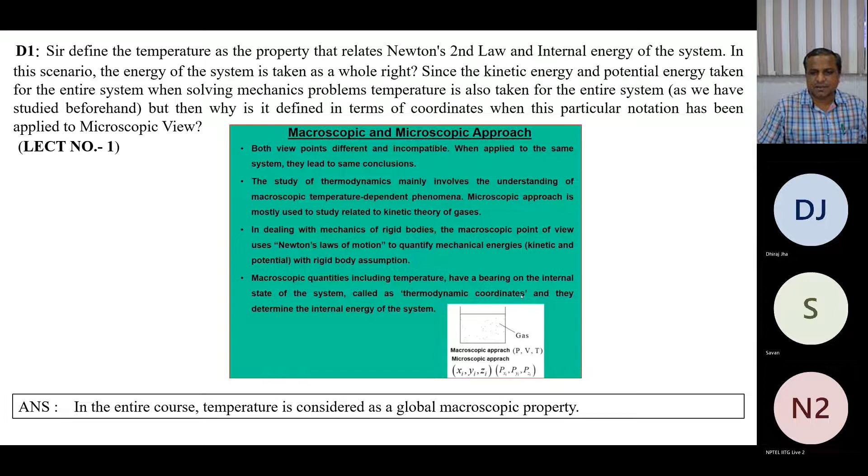But you should not worry about this microscopic approach, because in our entire course, we call temperature a global property, and it is a macroscopic property. When I say macroscopic property, that means we have taken enough mass, a minimum mass, for which the global temperature will not change. In a single line, temperature in our course is considered a macroscopic property, global in nature for the system.

The next question was on quiz 1, question number 7, which asked what the correct statements for the Carnot cycle are. The options are: the Carnot cycle is independent of the working substance; the Carnot cycle can have 100% efficiency; the Carnot cycle is represented by 2 isothermal and 2 adiabatic processes on a PV diagram. The learner wishes to know what happens to the source and sink temperatures. First of all, we have not asked anything about the source and sink temperatures.

But when you talk about 100% efficiency, of course, the sink temperature has some finite value, which means we are looking at the problem in a practical approach. So the efficiency of the Carnot cycle mainly depends on the source and sink temperatures. We can write it as efficiency equals 1 minus T2 by T1.

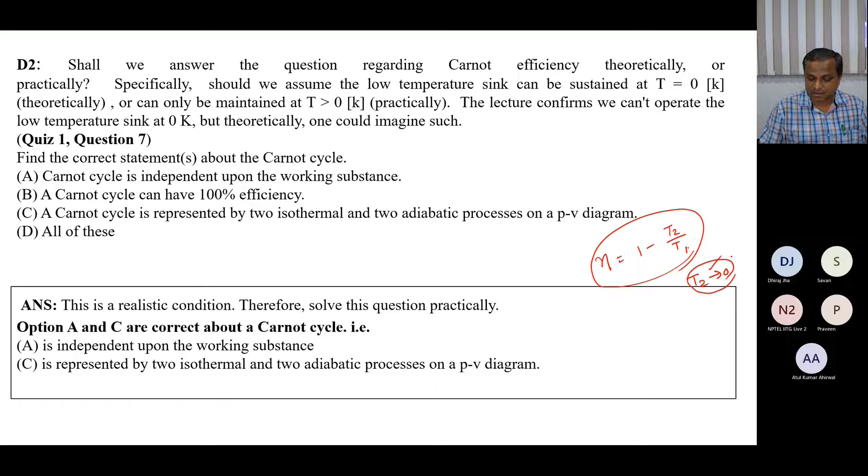It will have 100% efficiency when T2 goes to 0, which is a very hypothetical approach. That means the Kelvin temperature goes to 0, which cannot happen in a realistic or practical situation. This efficiency is the maximum possible efficiency, the thermodynamic estimate of maximum efficiency for the Carnot cycle. Considering this philosophy, option A and option C are correct.

The next query was based on quiz 2, question 10, about a reversible cyclic engine with 2 heat sources. One is a finite body at 900 Kelvin, so T1 is equal to 900 Kelvin. It is connected to a cyclic, reversible heat engine, which produces some work output while rejecting heat to a reservoir at 300 Kelvin.

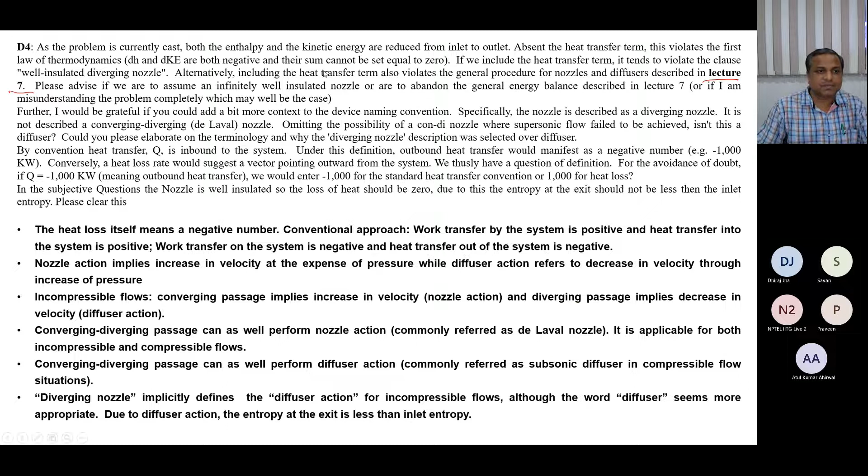The next query was mainly on lecture 7. It's a big statement the learner wishes to share, but for a few things we are not clear in what context the question was raised. I can sense some of the important concepts in the entire paragraph written by the learner.

The first thing pointed out is something about heat loss, a heat loss outward from the system. And when I say heat loss, by loss it means it's a negative quantity. One way to approach this is to recall our basic understanding of the conventional approach. In fact, we have to look into the UG level of this course, the notations for work transfer and heat transfer.

So in a conventional approach, work transfer by the system is positive and heat transfer into the system is positive. Work transfer by the system means the system does the work, and when some heat is entering into the system, it is taken as positive. So both heat and work need to be looked into simultaneously.

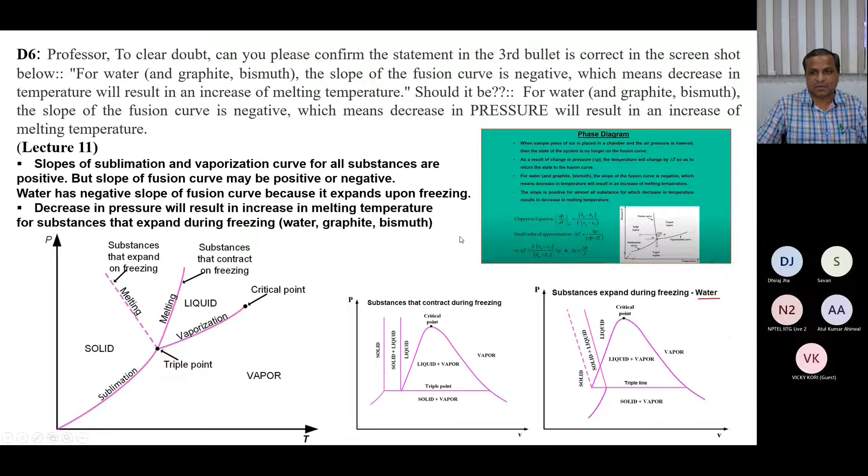Water in particular has a negative-slope fusion curve because it expands upon freezing. To frame it correctly, a decrease in pressure will increase the melting temperature for substances that expand during freezing. Some examples are water, graphite, and bismuth. But all other substances that contract will have a positive slope, so the reverse statement holds true. I hope you understand the meaning of this.

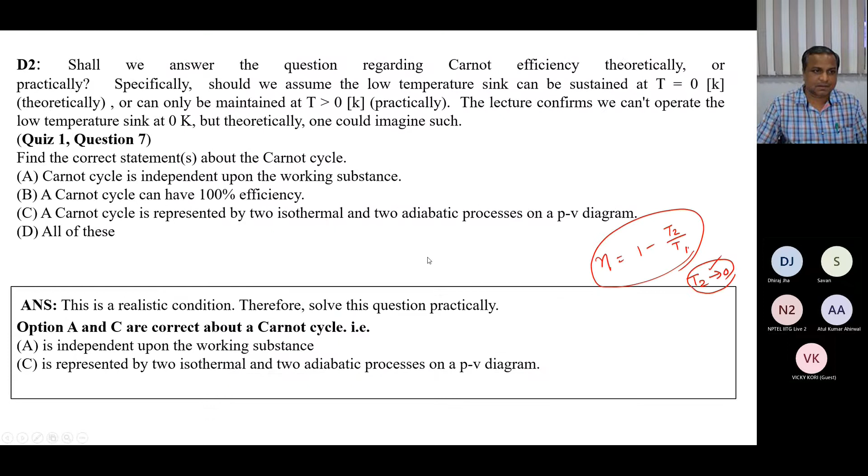Quiz 3, question 8. Here we are talking about atmospheric temperature, T0. There is missing data for T0, but this answer was calculated based on T0 as 278 Kelvin. Although there is missing data, when we calculate the exergy, we normally refer to the dead state. In all our lectures, we said that the dead state is typically considered as 1 atmosphere and a temperature of 300 Kelvin.

Since some data was missing, if you take T0 anywhere between 278 Kelvin and 300 Kelvin, whatever value you get, we will consider for calculating the entropy balance equations. So this number will have an answer range for these two temperatures, from T0 as 278 Kelvin to T0 as 300 Kelvin. Any answers falling in that range will be considered for evaluation.

So I hope it answers the question. You should not panic about these aspects. We are already considering an answer range, not a fixed answer. In our entire calculations, we are not sticking exactly to a fixed answer; we are talking about an answer range. So whatever temperature you considered, if your answer falls in that range, we can accept it. I hope I have answered your queries. Any other questions?

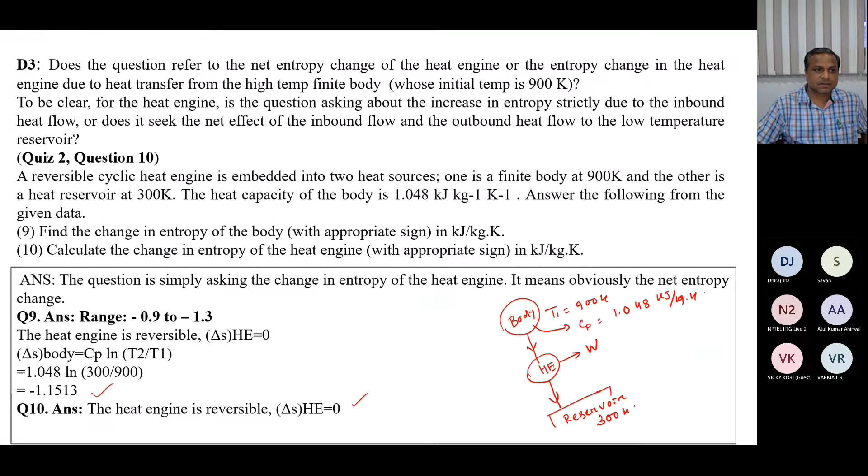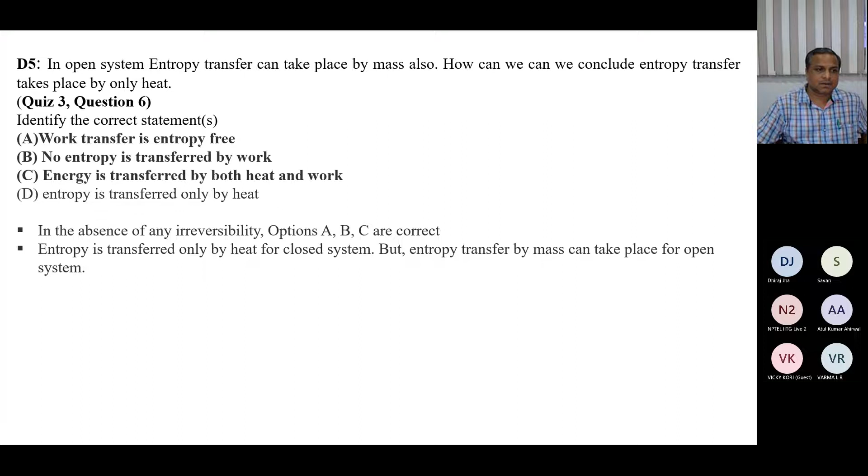Can we explain question 3, quiz 3? I really do not know whether it is in this slide or not. I don't have the questions here. These are the questions which were raised in the discussion forum; I do not have the details as of now. Whatever was discussed in the discussion forum, I have compiled for common understanding.